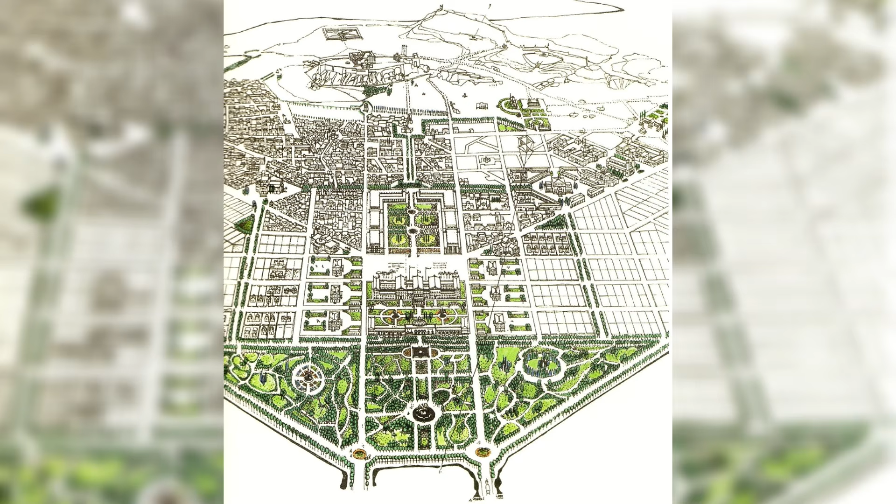As a result, the construction of a royal palace became an urgent necessity in Athens' transformation into a modern capital. The project attracted the attention of several architects who all had ambitious plans for the building but differed on where to construct it.

Among them, the boldest approach was taken by Carl Friedrich Schinkel, widely regarded as the preeminent German architect of the 19th century. His plan was nothing less than to stand eye to eye with the Parthenon, constructing a splendid palace on the narrow space of the Acropolis, overlooking the burgeoning city below.

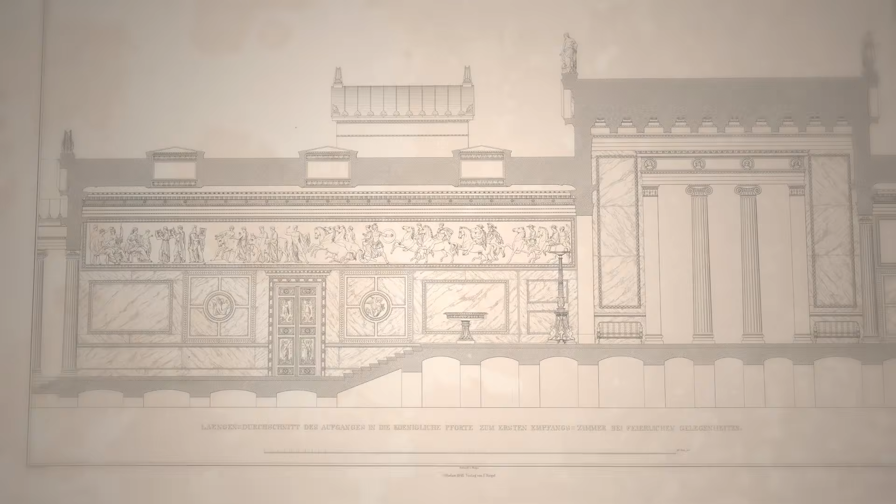In this video, we'll discover the various unrealized designs for King Otto's residence, and in particular the scheme by Schinkel, whose many illustrations allow us to view in detail one of the most beautiful and unique palaces never built.

At the same time as Athens became the Greek seat of government, another European capital was rapidly emerging as one of the largest cities on the continent. In the peaceful decades following Napoleon's defeat, Berlin, the capital of Prussia, doubled its population from 200,000 in 1816 to 400,000 by 1846.

To reflect the city's growing importance, new monumental buildings were constructed, creating a grand and modern center for the Prussian state. The man responsible for this transformation was the chief building director, Carl Friedrich Schinkel.

Many of the buildings he designed are still prominent landmarks of the city, like the guardhouse known as the Neue Wache, the Prussian national monument for the Liberation Wars, the Royal Theatre or Schauspielhaus, and the Altes Museum, where the royal art collection was displayed to the public.

In his architecture, Schinkel combined a wide range of influences, from medieval Gothic to Italian Renaissance and even modern industrial architecture from England. But his primary source of inspiration, at least during his most productive period, could be found in ancient Greece.

On either side of the Propylaea, he placed the stables and coachhouses needed by the royal household, while the large elongated space between the Parthenon and the Erechtheion is occupied by a racecourse inspired by ancient hippodromes. A carriageway running alongside it would have brought you to the main entrance of the modern palace, a grand porticoed gate called the New Propylaea.

Owing to the crowded nature of the citadel, the residence had to be constructed on whatever land remained east of the Parthenon, a small and difficult site to build on that Schinkel nonetheless took full advantage of.

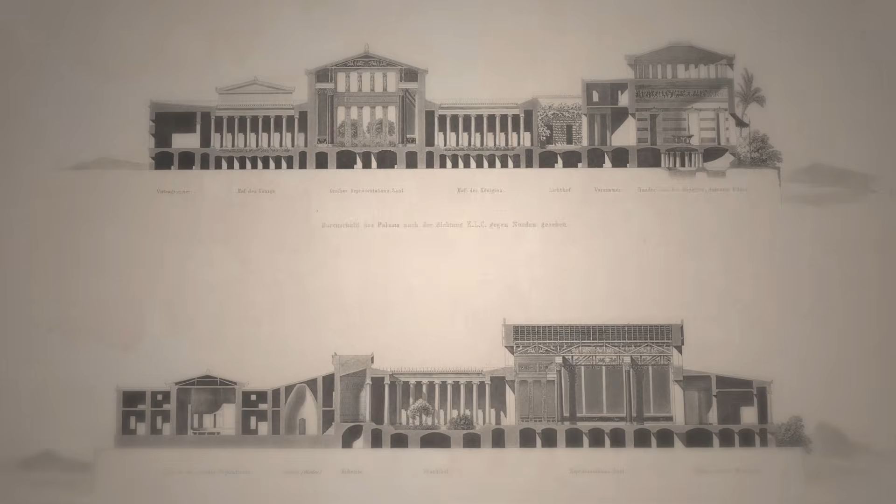Here, he laid out a complex series of halls and galleries, connected via delicate gardens and courtyards to form a residence that was both convenient and beautiful.

Externally, the palace lacked a unified facade and was instead organized into several substructures of moderate height so as not to compete for attention with the ancient monuments. Only the south side, facing the Saronic Gulf, presented a fairly regular appearance in the form of a long colonnade running from the royal chapel in the west to a large circular tower in the east.

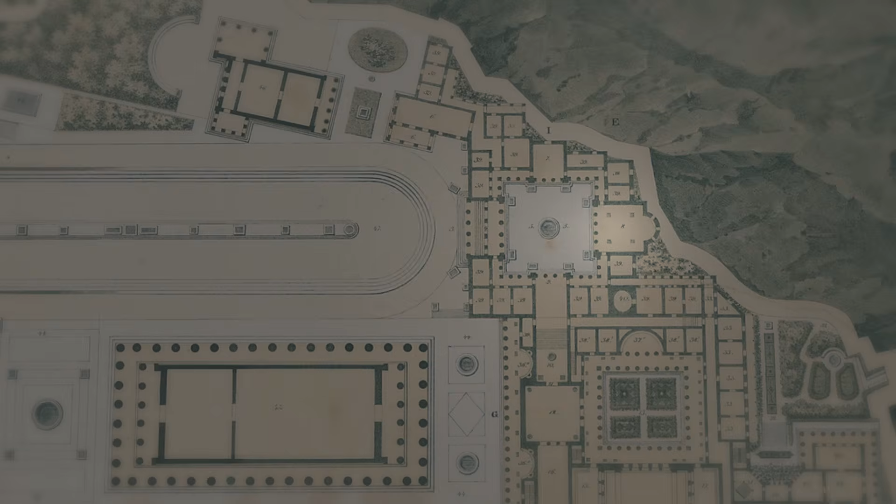When entering the palace via the New Propylaea, you would have found yourself in an open courtyard surrounded by rooms intended for higher officials and dignitaries. An assembly hall occupied the space directly opposite the portal, while a covered gallery extended to your right.

Schinkel illustrated this space in detail, revealing a sumptuously decorated hall leading up a gently rising staircase to a massive door. This door marked the ceremonial boundary between the public and private sections of the palace, and opened into a vestibule where the king would personally receive higher guests.

Beyond this room, the gallery continued until reaching a second courtyard, around which the king's living quarters were arranged. They also extended through an adjoining wing to the west, at the end of which stood the royal chapel.

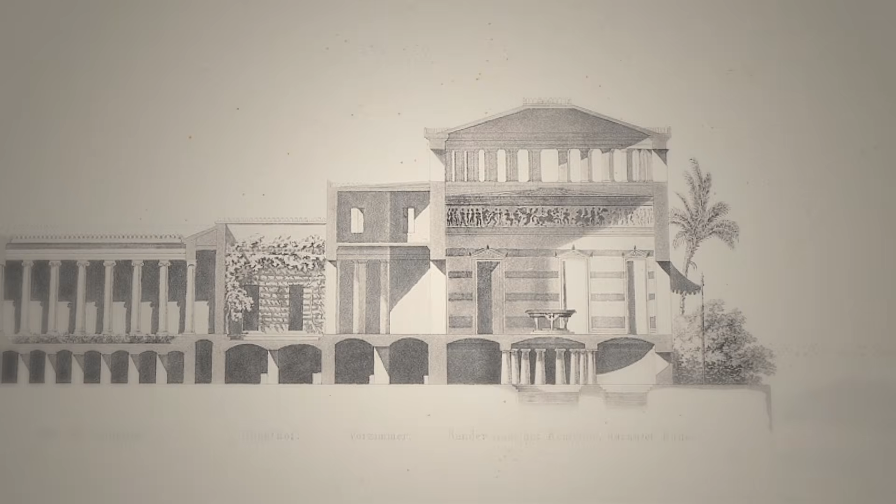In similar fashion, the queen's rooms are arranged around a corresponding courtyard in the more secluded eastern parts of the building. Here we also find the round tower, whose main floor would have become a spacious living room for the family.

An open balcony under a leafy tent roof stretches around the exterior, offering shade and a space for relaxation with spectacular views of the surrounding landscape.

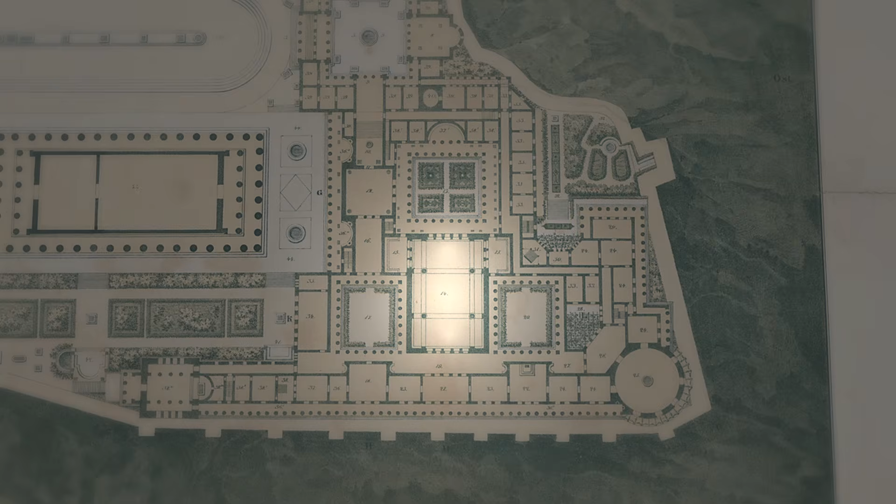The most impressive hall that the palace had to offer would have been located between the two courtyards of the royal couple. It was to be a lofty space, nearly as tall as the Parthenon itself, featuring 4 giant columns of black marble contrasting beautifully against the deep red color of the walls. The roof structure above is adorned with gilded animals and mythological creatures like lions and griffins, while 2-story pilaster arrangements carrying divine figures stand at each end of the room.

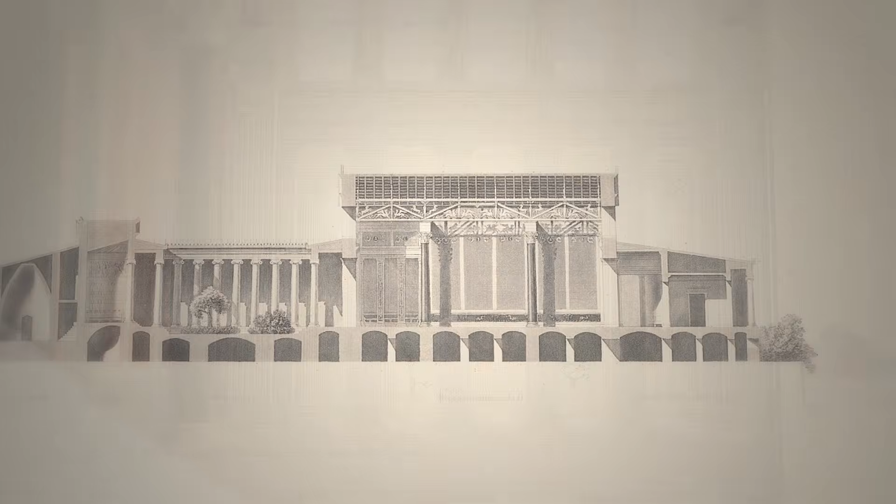Beyond them, to the north, is a garden adorned with grass, flowers, and orange trees, while the other end of the hall is connected via 2 smaller rooms to the previously mentioned colonnade on the south front. Thereby, someone sitting in the inner garden would have been able to glimpse the clear blue water of the Aegean Sea between the forest of columns.

Meanwhile, the more utilitarian parts of the palace were discreetly tucked away in the basement below these spectacular rooms. The baths were to be found below the rotunda, while other areas contained service rooms, kitchens, and living quarters for the staff.

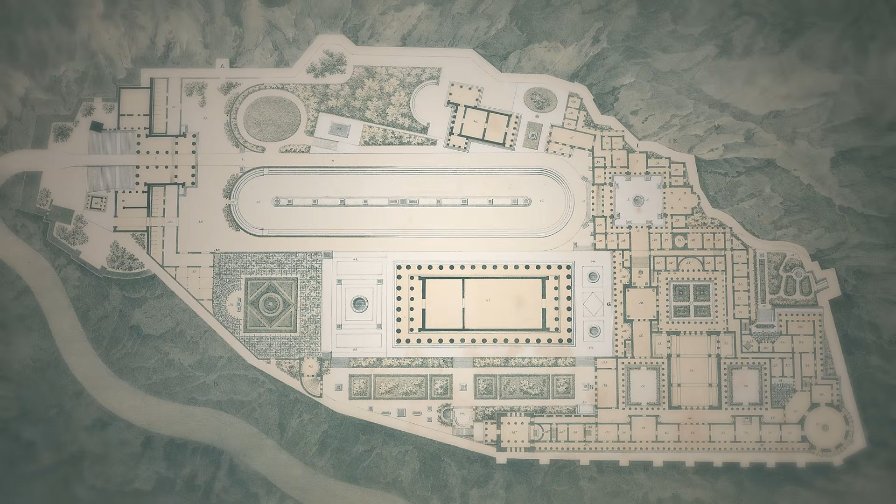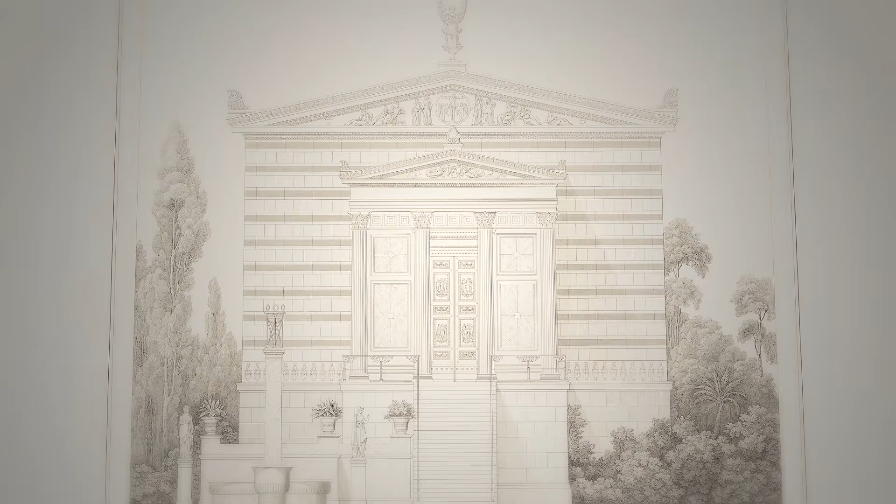As a final touch, Schinkel would unify his architectural composition with living ornament. The contrast between the ancient and new was to be softened with fragrant rose gardens, vineyards, orange trees, and olive groves, interspersed with cypresses, palms, and laurel bushes, which would create a very different impression to the austere, rocky landscape that we know today.

When Schinkel had completed all the drawings, he sent them along with an accompanying commentary to Maximilian in Munich, who in turn forwarded the package to his brother in Greece. Because of the informal nature of the exchange, Otto never wrote back to the architect, and it would take 2 years before Schinkel was informed about what had happened to his project.

In the spring of 1836, his friend Prince Hermann von Pückler-Muskau was visiting Athens, and explained in a letter that the king was very impressed by Schinkel's project and considered it the ideal solution. But the unhappy financial situation of the country had forced him to choose a more modest design, which was mere prose by comparison. The prince continued, writing, "Yours is not feasible here."

"You would have to send Phidias and Callicrates along with it, and above all, the material resources that Pericles had at his disposal. People here are so poor that they cannot even repair the road to Pentelicus, the mountain where the marble of the ancient Acropolis had been quarried, and so the columns of the portico at the new palace will be made of brick."

With Schinkel's proposal being set aside, the Acropolis' future as an archaeological site was sealed. The post-classical fortifications, barracks, powder houses, and the mosque were removed, and the ancient monuments began to be pieced back together from scattered fragments on the plateau.

But despite this preservationist approach, one modern addition was made to the ensemble. In 1865, a museum began to be built on the eastern part of the site, where Schinkel had planned his palace. It covered much of what would have been the Great Hall and the Queen's apartments, and was expanded to a modernist design in the 1950s.

While the building is still standing, it closed its doors in 2007 when its antiquities were moved to a new museum at the foot of the Acropolis.

Schinkel's plan was not the only one to be rejected on financial grounds. Already in 1831, 2 of his former students, the Greek Stamatios Kleanthes and his Prussian colleague Eduard Schaubert, had arrived in Athens to create a topographical map of the town. 2 years later, they were commissioned by the government to draw up the first official plan of the new capital of Greece.

In it, Kleanthes and Schaubert proposed a complete transformation of Athens into a modern and majestic city of culture, learning, and art that could compare favorably with other European seats of government and live up to the lofty ideals associated with its name.

About half of the old town would be demolished to create an open-air museum showcasing the various ancient monuments in the area. The rest was meant to be carved up into neat blocks and integrated into the rational plan of the new city, which extended north to form a triangle.

All of its main avenues would converge at a grand square at the top of this shape, where the royal palace would have stood. The building was placed so that the king, standing on his balcony, would command views of all the main sights of the city and beyond: the beautiful Lycabettus Hill to the east, the ancient Pan-Athenaic Stadium to the southeast, the Acropolis directly to the south.

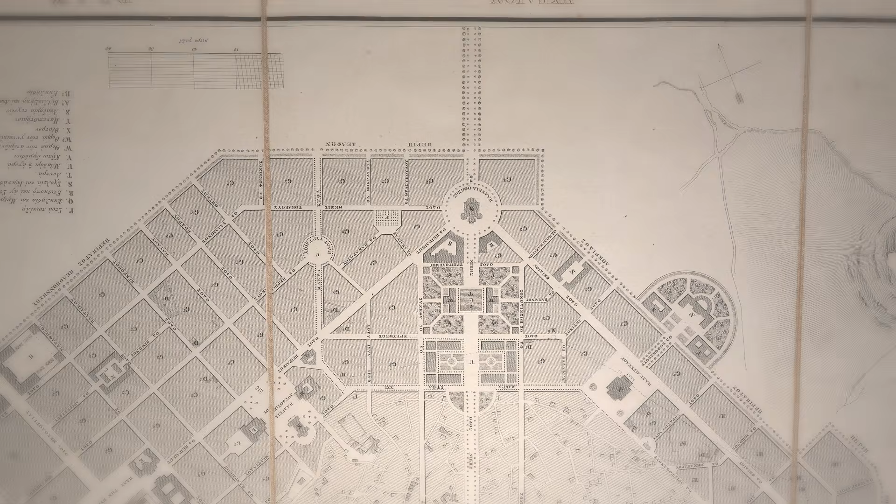At the top of the triangle, where Kleanthes and Schaubert proposed placing the royal palace, he instead envisioned a metropolitan church. But what ultimately happened was actually more in line with the original plan. In the end, a square was built here, but without the palace. It's known as Omonia Square, and while the area around it remained nearly deserted until the late 1800s, it is now a bustling crossroads at the heart of the modern city.

Von Klenze instead moved the royal palace to a more tranquil site at the southwestern edge of Athens. A collection of public buildings and an ornate garden would serve as a buffer from the nearby Old Town and from the busy street leading to Piraeus, while large, informal gardens extended from the building up to Areopagus Hill near the Acropolis.

Klenze, who apart from being an architect was also an accomplished painter, created beautiful illustrations of his design, revealing a building of colossal proportions but comfortably nestled in the Mediterranean landscape. Stylistically, it reflected his preference for the Greek Revival style, and made prominent use of vivid colors to decorate the exterior, something that would have originally been seen on the Parthenon and other ancient monuments as well.

But this vision was never to be realized. The main problem with Klenze's building, apart from its enormous size, was the site he chose for it. As his main rival at the Bavarian court, Friedrich von Gärtner, pointed out, the plot of land was too uneven, which ironically was the same thing Klenze had criticized the previous site for.